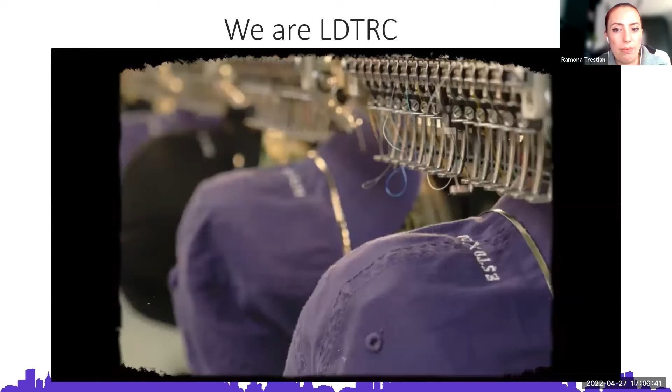The future is about digital technology, about the new and advanced. Digital twin has been picking up pace since 2017. A lot of companies can see the potential application of digital twin technology. A digital twin is a computational model that is a representation of a real-world entity.

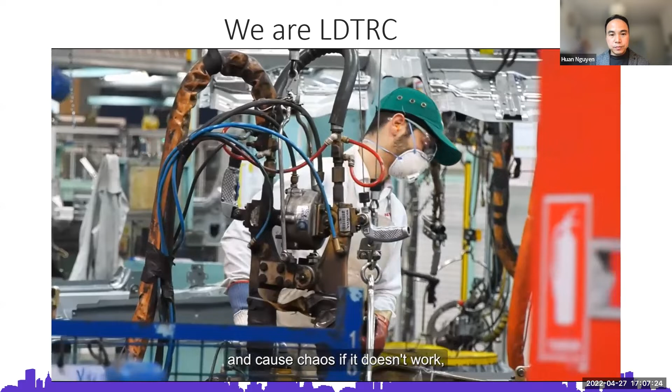Instead of making changes to a physical system, or workforce, or a company's operations and causing chaos if it doesn't work, we create a replica of that system in the digital world that allows us to explore those opportunities and changes and their impact before we deploy it into the real world.

The London Digital Twin Research Centre was founded in March 2020, and before that we were already doing research to explore digital twins in manufacturing related areas. Why would a company adopt a digital twin, and how will they justify investing in a new technology? The center provides them with the technology, validation, demonstration of the work, and bridges the gap between academia and industry.

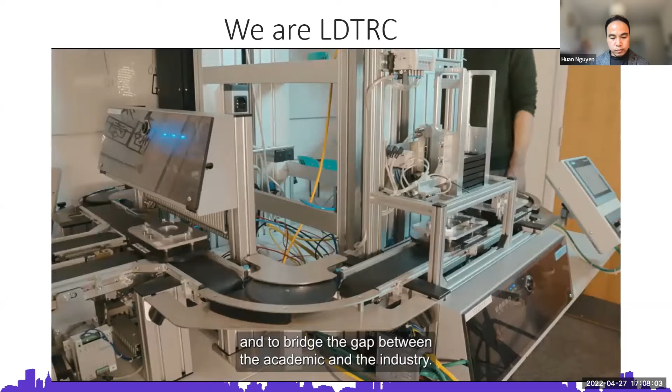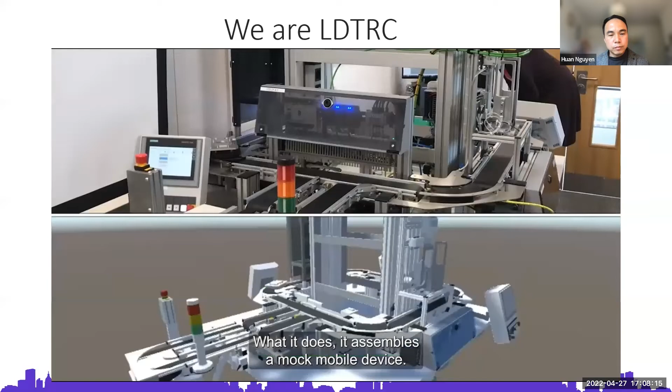So we try to develop a digital twin model of the smart factory. At Middlesex University we have this Festo Cyber-Physical Lab - it's an assembly line that assembles a mock mobile device. You can collect all this data and analyze it, applying different machine learning solutions.

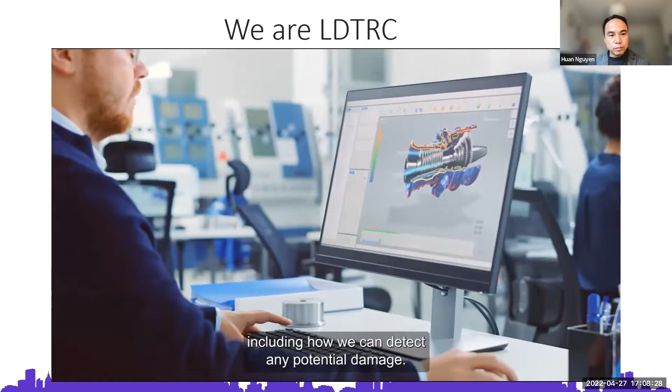That also can help you to optimize the processes, including how we can detect any potential damage, and also we can optimize the life cycle of the system.

We are trying to build a digital twin that can be adopted as a baseline by industries, so they can build their solutions on top of this one. We can help by building the foundation, developing the framework, and doing the fundamental research, and we have been working with our partner from Vietnam doing just that.

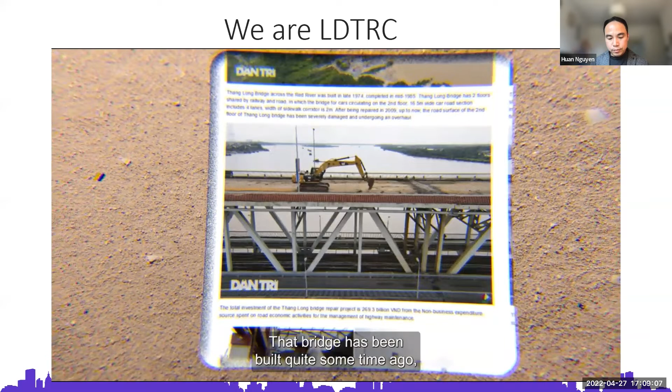We built a digital twin version of Thang Long Bridge, which connects the Noi Bai International Airport in Vietnam with the capital. That bridge was built quite some time ago, but recently it has a lot of damage. We helped them model the digital version of it, analyzing the structure of the bridge before choosing the optimal solution for the repair.

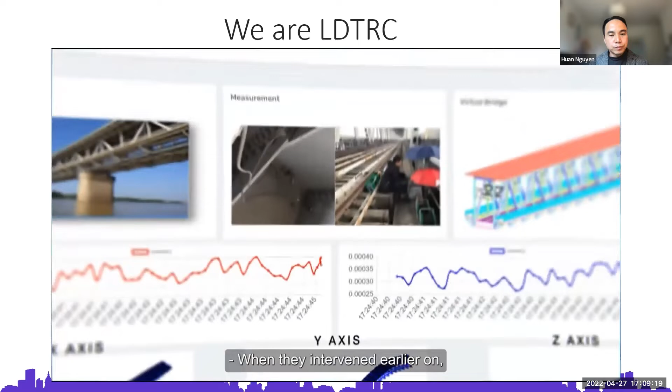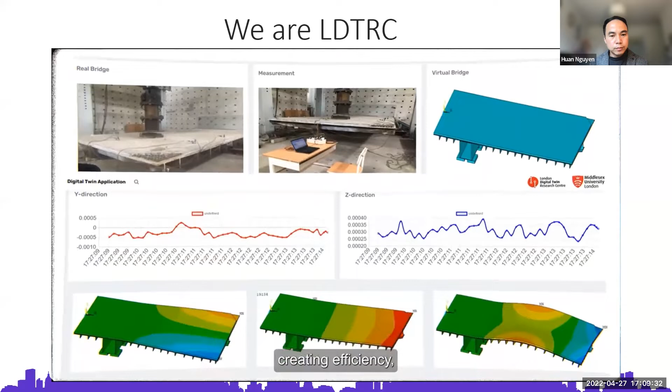When they intervened earlier on, they had a lot less problems to deal with than if they left it unattended, or they weren't even aware of those problems. And those who adopt it swear that the benefits have been immense in terms of saving money, creating efficiency, but most of all, driving up productivity.

So what's the difference between conventional simulation and digital twin technology? Modeling existing systems has been around for a long time, but physical and digital were not linked at all. We're now looking to link the two.

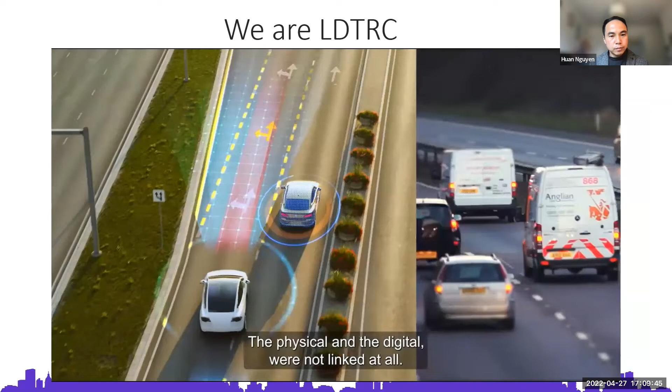So it's not only a virtual representation of your physical object, it's also the interaction between the physical object and the virtual representation. We can consider digital twins of biological phenomena such as the beating of the heart.

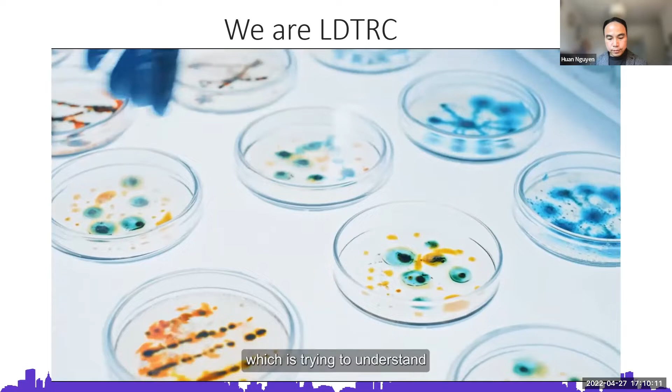We can also look at socio-economic digital twins, which try to understand how humans and social phenomena interact with technology. One very good example of that is all the work that has been done in the COVID-19 pandemic. Digital twins are like an umbrella for all these enabling technologies.

So we have Internet of Things, we have machine learning, artificial intelligence. They all come together within this digital twin.

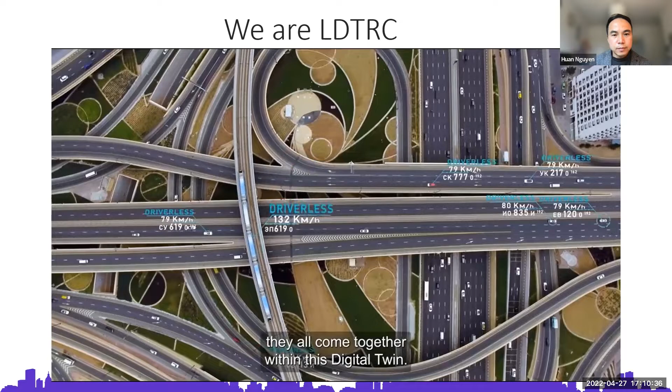We are targeting what we call self-evolving, which means that the digital version needs to help the physical system be better, how to make it smart, how to add intelligence to the system. Luckily now with the advance of AI and machine learning, that is very much doable.

At Middlesex, we want to be delivering world-class research which actually solves problems. We want to do it from a position of ethics.

Digital twin research could have potential implications for automated decision-making, for example. I would personally argue against that and say it's really important that we have humans in the loop.

The centre has its role as a research centre, but it doesn't remain just as a research centre reserved for a certain small group of people. The centre is there to enhance our knowledge and pass that knowledge on to our curriculum, our undergraduates and postgraduate students.

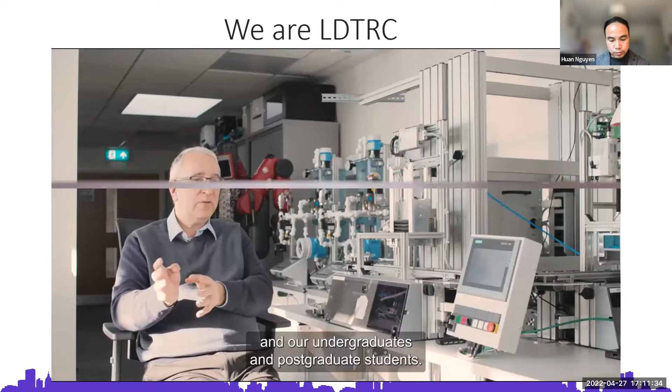Yes, so this was an introduction to our centre and what we are doing. And the last bit you've seen is that what we are trying to do is connect with the industry. So you have the industry, we have the academic research, and then we want to put this into a so-called connected curriculum, where we bring undergraduate and postgraduate students to work on these research projects and align the curriculum with whatever is required from the industry.

So this short intro video gave you an idea of what a digital twin is, and as you see, the focus of the research centre is on digital twins. This digital twin, as it was mentioned, is like a high fidelity digital mirror of the physical entity, where the former evolves synchronously with the latter throughout their entire life cycle.

So that means you have a physical entity, then you have the digital representation of that physical entity, and the digital twin will be these two entities communicating in a bidirectional way.

So in the end, you have this digital twin, which consists of a virtual object representation of a real world item, in which the virtual is mapped to physical things in the real world, such as equipment, robots, or basically any entity or connected asset, as well as the processes involved there, because you might have a digital twin of a process and not have a digital representation of that process.

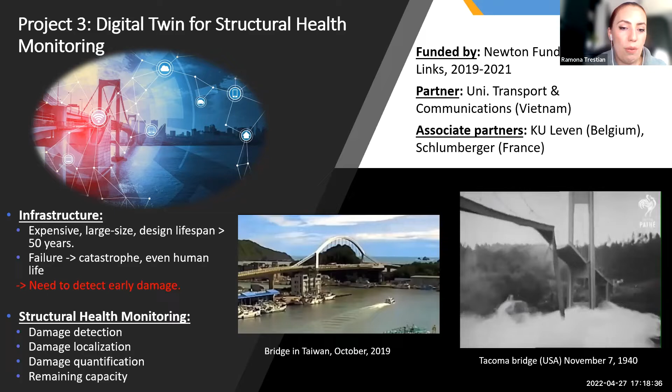in Middlesex University. Another project is digital twin for structural health monitoring. We've seen over the years that there were many catastrophes, especially for bridges, that even involved human lives. So you would think, how can you use technology a step further to try to prevent this kind of disaster? We had a project on digital twin for structural health monitoring, and the focus was on the structural health of bridges.

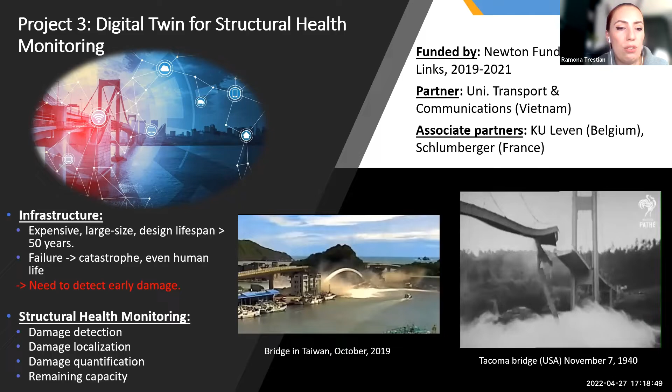You want to have this continuous and long-term assessment of the operational state of the bridge, detect any structural damages, monitor the damage extent, estimate safety and reliability, simulate behaviors in extreme conditions, predict the remaining lifetime, optimize the service efficiency, and guide cost-effective maintenance strategy as well.

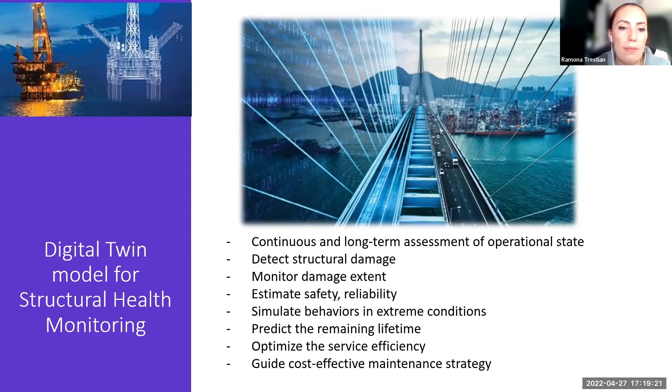Another project I want to mention is digital twin for automation, maintenance, and monitoring in industry for smart factory. This project was in collaboration with India, so it was a UK-India collaboration, and we looked at creating a near real-time digital image of a physical process in manufacturing industry. For this, we used our Siemens Festo Industry 4.0 cyber physical system at Middlesex University, and we created a digital twin of this.

From the real product you gather from the sensors, using Internet of Things, all this maintenance history, operational history, real-time operational data, and so on. Then at the digital twin, you use statistical models or machine learning algorithms for optimized operation that is going to be imposed on the real system, for predictive maintenance and so on. So this two-way interaction between the physical world and the digital world gives you this digital twin.

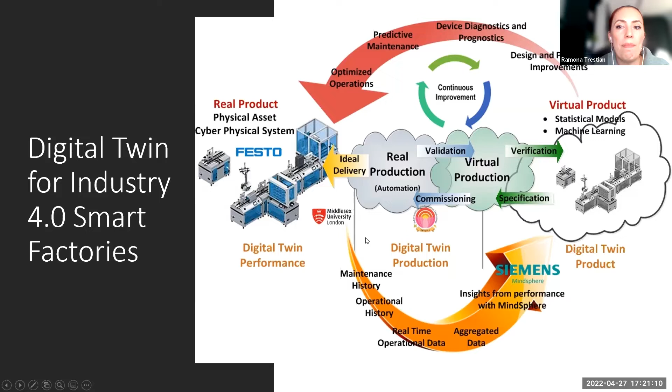Now, this cyber physical system we have at Middlesex University is, as you've seen in the intro video, an assembly line. What it does is an assembly production line, which is a small scale one. We don't have a full scale operational one, but it's a small scale one here for academic purposes, and we use it for teaching as well.

What is happening is it will assemble a mock mobile device. You have this conveyor belt and several stations - exactly 6 stations, consisting of 2 islands. So you have 3 stations per island, and the way it works is first you place an order, and then the carrier will go to the first station.

At the first station, it happens the placement of the lower cover of the product. After this is placed, the carrier will go to the next station where you have the placement of the PCB and fuses. Then it goes to the next station, which does the image-based inspection for accuracy - checking how many fuses are on the PCB and what combination of fuses is used. Then it goes to the next station, which does the upper cover assignment.

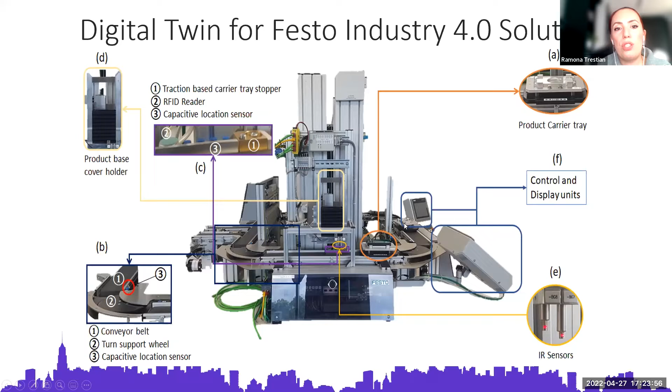Here is just an example of the digital twin implemented here, and here is the real cyber physical system working. As you can see, as the carrier is moving in real time here, in the digital model it is also following the same movement of the carrier, and then the carrier will stop at each station, and so on.

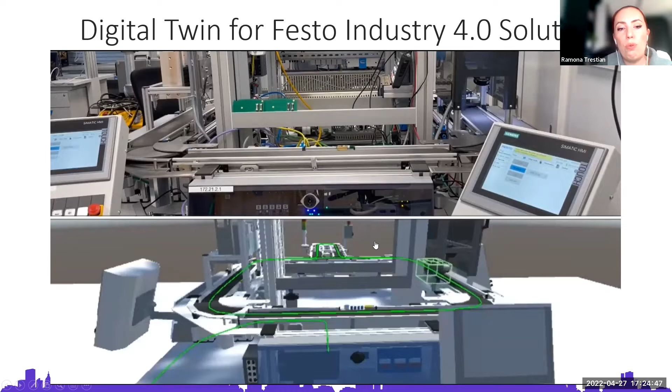Now, this digital model was created using Unity, and then you have the sensor information from the real CP lab linked to the digital model, and that's the way you create this two-way communication between the physical entity and the digital entity.

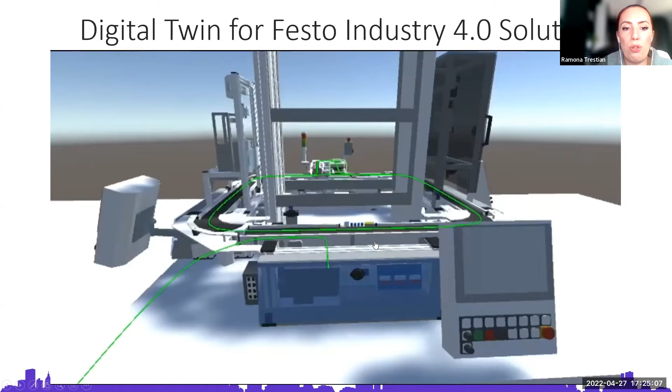Now, how will you use that? Well, you collect all this data, and then it will help you apply different machine learning algorithms to help you do some predictive maintenance, or optimize the operation of the real CP lab.

Okay, so as a motivation of why is this digital twin concept important, well, we can have a look at some of the global digital twins market insights.

For 2020-2025, up to 89% of all the Internet of Things platforms will contain some form of digital twinning capability by 2025, and digital twinning will become standard feature functionality for IoT application enablement by 2027.

Over 92% of vendors recognize the need for industrial IoT APIs and platform integration with digital twinning functionality for the industrial verticals. And nearly 36% of executives across a broad spectrum of industry verticals understand the benefits of digital twinning, and 53% of them plan to incorporate it within their operations by 2028.

I believe these numbers might have changed, like it might have been pushed even higher by the current pandemic, because what we've seen with COVID-19 is that it pushed digital transformation even more. We've seen many of the industry verticals that had to go online, had to go digital. So we've seen a boost in digital development in the past 2 or 3 years.

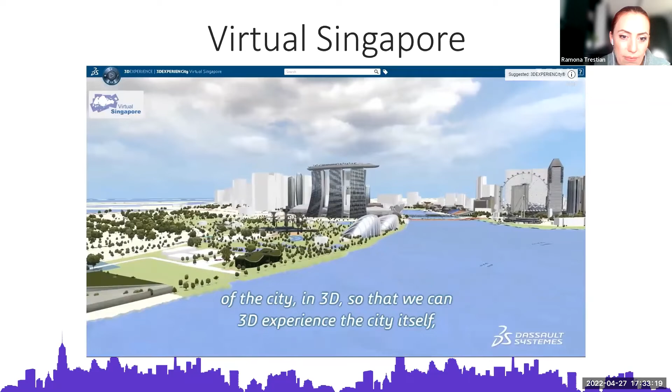The cooperation with Singapore is about creating this digital representation of the city in 3D so that we can experience the city itself, to evaluate solutions, understand how it works, and understand how it can be improved.

Singapore faces a lot of urban challenges. The researchers are trying to address some of these challenges through modeling and simulation. And what we want to do is have a unified 3D model of Singapore.

That's why we started the program Virtual Singapore. It aims to synergize all the 3D efforts from various agencies of the government onto a common platform, so that all public agencies can make use of a common 3D digital city model of Singapore.

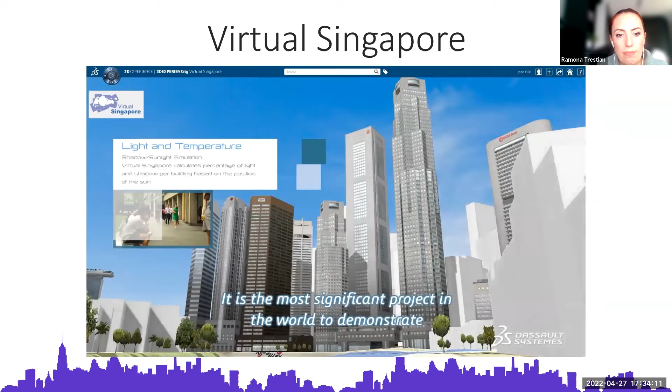It's the most significant project in the world to demonstrate the power of the 3D experience platform and the 3D experience city strategy. It's like many programs we did in the past with industry, but this one is multi-industry.

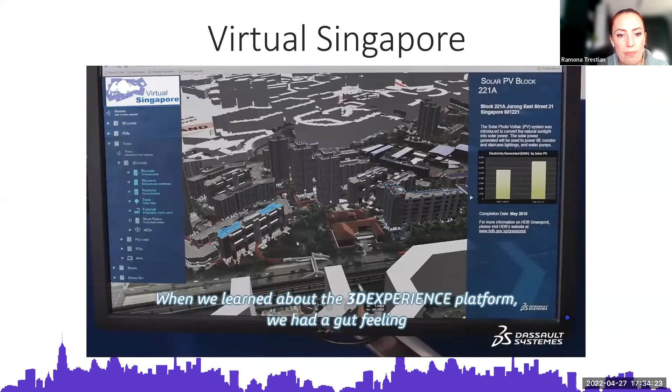When we learned about the 3D experience platform, we had a gut feel that it has the capabilities to allow us to build a virtual Singapore. If you look at the product innovation platform and take that into a citywide context, the power of the platform comes from bringing together different types of information, different types of data.

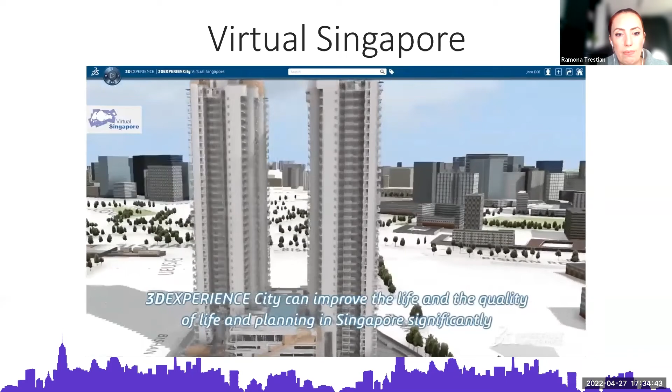3D Experience City can improve life and the quality of life and planning in Singapore significantly, because it creates a unique data referential. Furthermore, it offers a design and authoring environment in which you can simulate what-if scenarios within it.

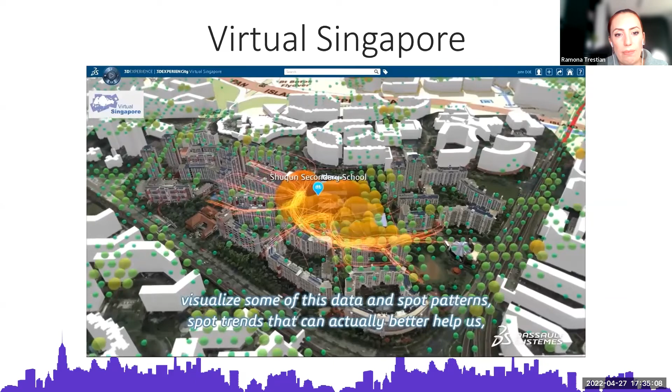Once you have data and tag it into a 3D map, that allows us to visualize some of this data and spot patterns, spot trends that can actually help us, especially in the Housing and Development Board. This will further improve the way we plan and design our towns and estates.

Singapore is a city-state, and there's very little room that we can actually experiment with our plans. Virtual Singapore eliminates the necessity of trying these plans out in the actual physical environment, where we have very little space. Today, the world is fueled by a massive amount of data.

Moving forward, we will also take in dynamic, real-time information like IoT devices. We developed the National Science Experiment to capture urban environmental data and allow our students to gain insights from the data collected. We can stream the data into Virtual Singapore and have it represented in the virtual world. We're measuring temperature, pressure, humidity, light, noise levels, infrared temperature, as well as motion and counting steps.

It's really useful as an analyst to look at the data in 3D, because we end up having broad questions which we can then drill down and see the details using a platform like Virtual Singapore.

We've seen a large amount of interest from other cities across the globe as to what's going on here in Singapore. We're trying, with this project in particular, to harmonize product, life and nature, in order to arrive not only at a smart city, but more importantly, perhaps, a more sustainable, smarter living in the city.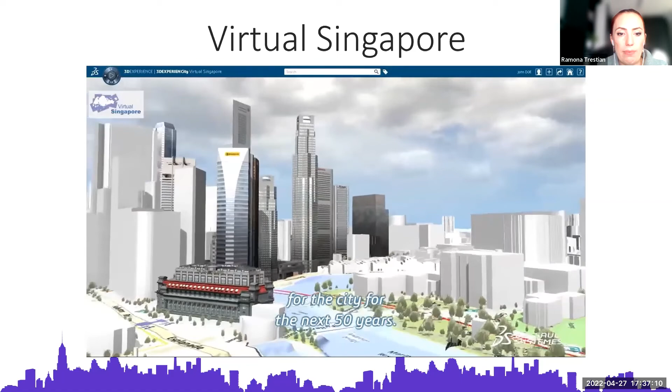I enjoy the frank and openness with Dassault Systèmes, not only with the R&D team, but with senior management at large. Dassault Systèmes' forward-looking and planning framework gels well with Singapore. Dassault Systèmes has a long story of partnership from the last 30 years with many companies, but this one is with the government. This one is really to share a vision for the city for the next 50 years. This virtual world of a city is going to be a first in the world, but it's also going to be a game changer to think about the city of the future, and that's what we are doing together with Singapore.

Okay, so another example or use case of digital twin is the digital twin of the 5G network. Maybe you are aware that we have countries that already started deploying this 5G network. And you can actually use this 5G network in two ways. First of all, you need the 5G network to have all these high data rates to accommodate digital twin applications. But you also can have the digital twin of the actual 5G network.

And how is that useful? Well, it is useful when you think about that deploying a 5G network now, it's quite expensive. So before actually deploying and investing in a 5G network, you can use a digital twin as a simulator to simulate the coverage area, all these parameters of your network. And after that, after you deploy the actual network, you can have the digital twin that can run in parallel with the network for optimization, continuous optimization of that network.

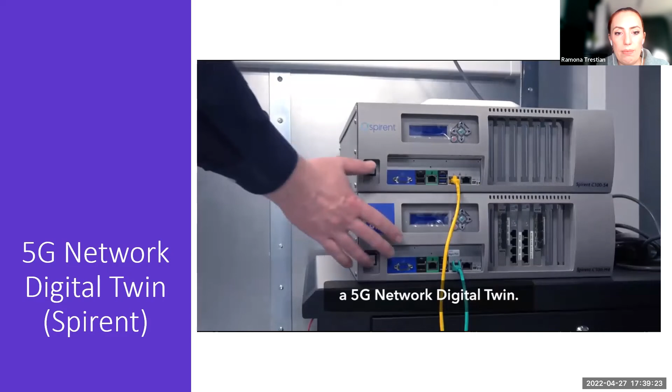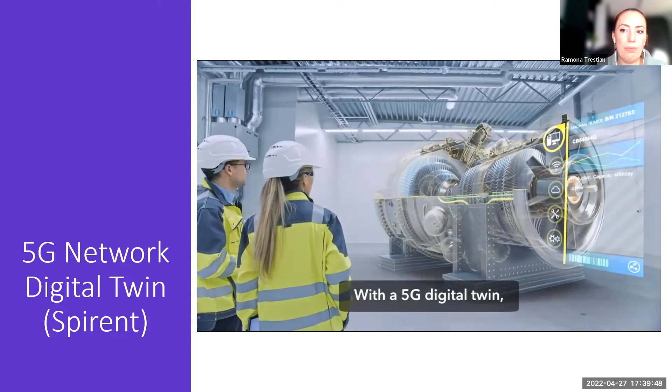The future of 5G seems limitless. Billions of mobile devices, homes, cars, even cities, all transferring massive amounts of data at blazing fast speeds with ultra-low latency. The companies that support these connected devices need a way to accurately test and validate the way their products will integrate with the network. But with 5G still only in its infancy, how do you test the real-world scenarios of a network that only currently sees a small fraction of its future usage? At Spirent, we're making testing possible by utilizing a new and agile approach, a 5G network digital twin. This emulated software replica of the 5G physical network allows for continuous prototyping, testing, and optimization across a variety of potential situations. Digital twins have been used to design and simulate the performance of everything from airplanes to cargo ships. NASA has been utilizing them for decades to simulate the harsh environments of space. With a 5G digital twin, Spirent provides designers and developers a cost-effective and flexible environment to accelerate their R&D processes and increase productivity. We can help reduce risk by safely testing what-if scenarios and cyber attacks, optimize decision-making by modeling unlimited configurations, and improve reliability by identifying design weaknesses and opportunities. 5G is the future of connectivity. Secure your place by preparing for it today. Experience emulation without limitations with a 5G network digital twin.

And I think this is the last example. We've seen that one promising solution of this digital twin is it's used in the automotive sector. So you use this digital twin to create the virtual model of a 5G connected vehicle. So why is this useful is that, of course, we are speaking about the automotive industry where you have your driverless cars. So before putting a driverless car on the real streets, you want to make sure that it works perfectly. So you use this realistic simulator to test all the possible scenarios of that car. So let's see this use case.

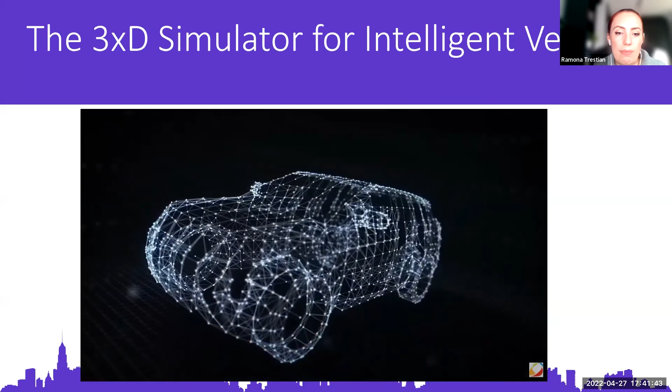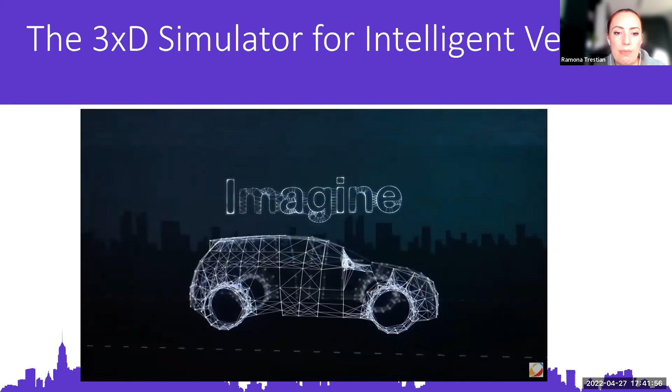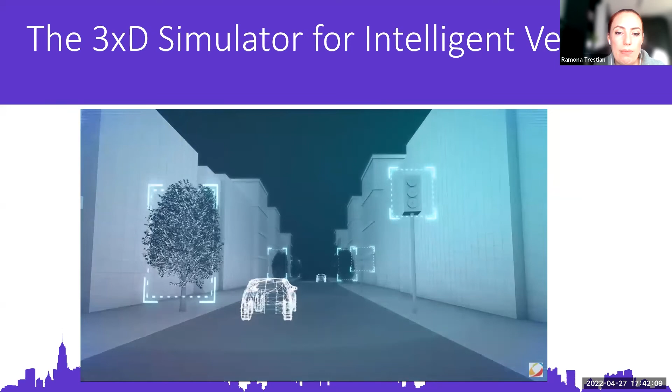What if getting from A to B didn't involve sitting behind a wheel? What if, instead of driving ourselves, we let the car do the work? We're not talking science fiction. The cars on our roads already have a basic level of intelligence. But for our cars to do more, so that we can do more, they need to be smarter. Imagine a fully autonomous vehicle, able to make the right decisions at the right time. Journeys will be safer, they'll be more efficient, and you'll be free to focus on the things that matter most. Of course, to do that, we need to perfect the technology. Intelligent vehicles will use our most advanced technologies in new ways and will need to respond to complex driving situations, just as a human driver would.

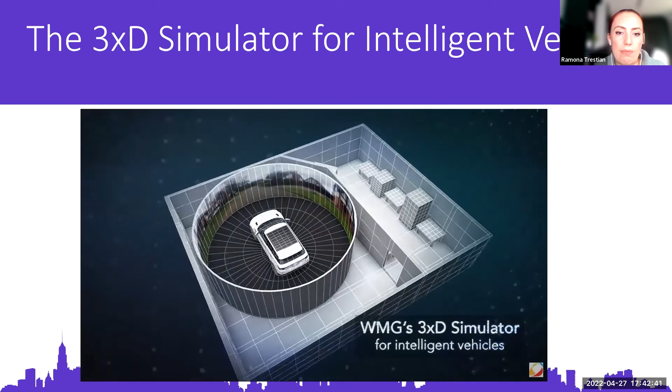We all know how difficult it is to see the road as the sun rises, or how frustrating it is when our phone loses signal. But how do you test if an intelligent vehicle can manage these real-world scenarios? Our world-leading applied research, combined with our approach to working with industry, makes WMG the best partner to develop intelligent vehicle technology.

We're working to make intelligent vehicles as affordable and usable as the cars we drive today, creating a new driving experience that all of us can enjoy.

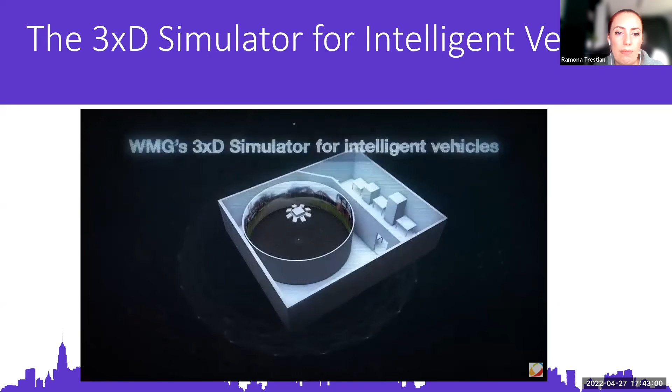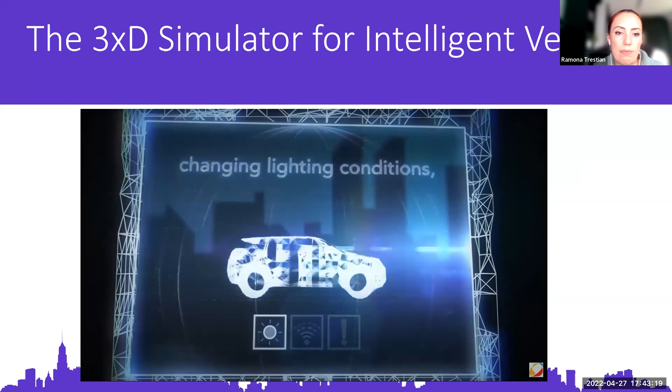WMG's 3xD simulator for intelligent vehicles is the only simulator of its kind, designed specifically to test the real-world robustness and usability of smart, connected and autonomous vehicle technology. Our research vision is to recreate the world for an intelligent vehicle within the 3xD simulator, replicating complex driving scenarios, changing lighting conditions, communications interference or unexpected events, all in a safe and repeatable environment.

Using our unique signal emulation capability, we aim to create our own wireless world, allowing us to develop next-generation communication protocols. We can replicate GPS or 4G signal loss, or even simulate a cyber attack. We will also validate sensing technologies like radar, LiDAR, cameras, and ultrasonics.

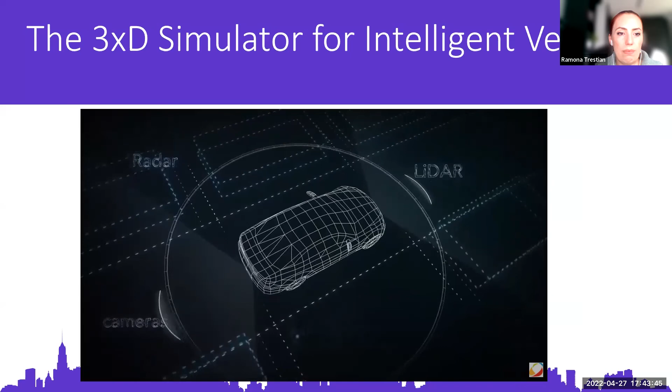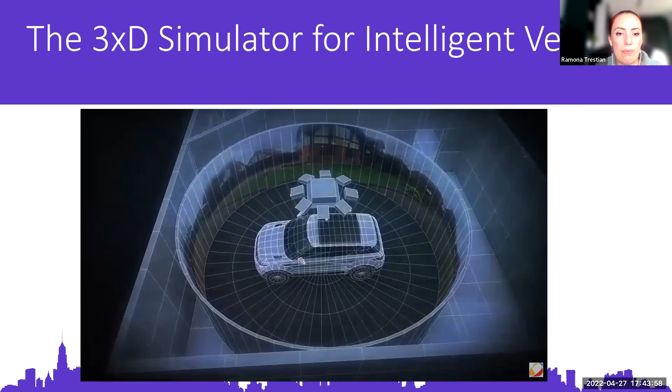30 miles of photorealistic, real-world driving routes presented via 360-degree high-definition visuals, 3D surround sound, and real vehicle motion deliver an immersive experience for driver-in-the-loop technology evaluations.

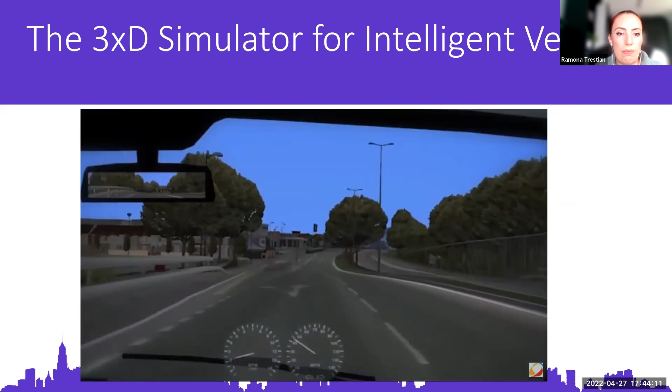Through working with us, innovative companies will quickly learn about the real capabilities of their technology and gain a better understanding of how users interact and respond. Policymakers will be provided with early evidence against which to make informed decisions and set future standards. All this leads to reduced risk and accelerated development towards real-world trials and ultimately implementation of intelligent vehicles and technology.

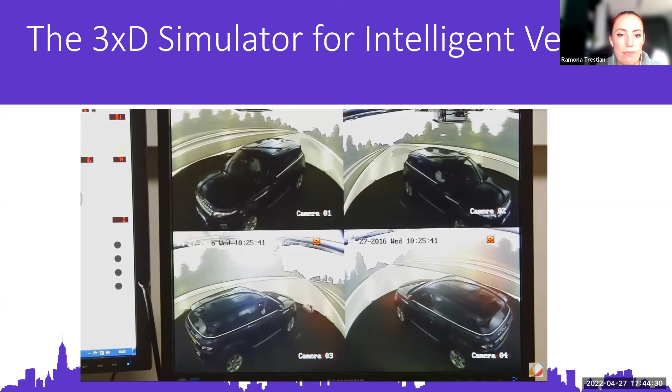Our research will enable technology breakthroughs to happen more quickly, with increased confidence, bringing the benefits into all of our lives. Discover more about our research and how we can work together by visiting.

So these were some of the use cases of this digital twin. Through our project at the London Digital Twin Research Centre and different use cases, you've seen that this digital twin concept has different applicability in different industries. So it's something for the future. This is the direction of the technology and also of the industry, and we see, okay, what will be the future of this digital twin?

We will have this ecosystem of digital twins, because you've seen that you have a digital twin of a car, you have the digital twin of the city, you have the digital twin of a person, if you wish, or anything. So you have this ecosystem of digital twins, and all of these digital twins need to work together to form this optimized digital world.

So if you think about it, it's like a system of systems, and you have all these stakeholders that need to work together for this ecosystem to work.

So this is what we are trying to do here at Middlesex University. We are looking at the direction of the industry, and we see that digital twin is here to stay, and this is the direction of the technology. So we need to prepare the next generation workforce to be able to work in this environment.